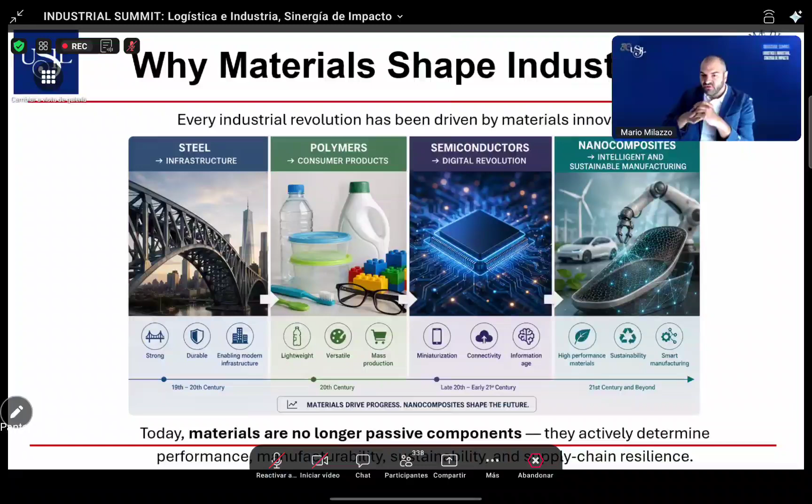Revolution that we speak about materials, because every industrial revolution has been driven by materials innovation. Today, our Pope presented his new message about artificial intelligence and how artificial intelligence can affect and influence our lives, and how artificial intelligence can also affect the new industrial revolution.

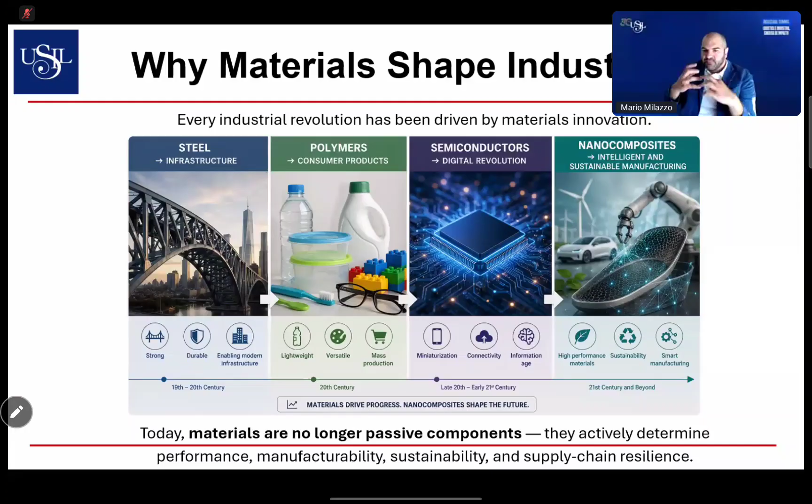But it's also important to speak about materials, because today materials are no longer passive components, because they can actually determine performance, manufacturability, sustainability, and supply chain resilience. So every century basically has had its proper innovation. We started with steel, then we moved to polymers, semiconductors, and now we are in the era of nanocomposites that can be merged together with the field of intelligent, sustainable manufacturing.

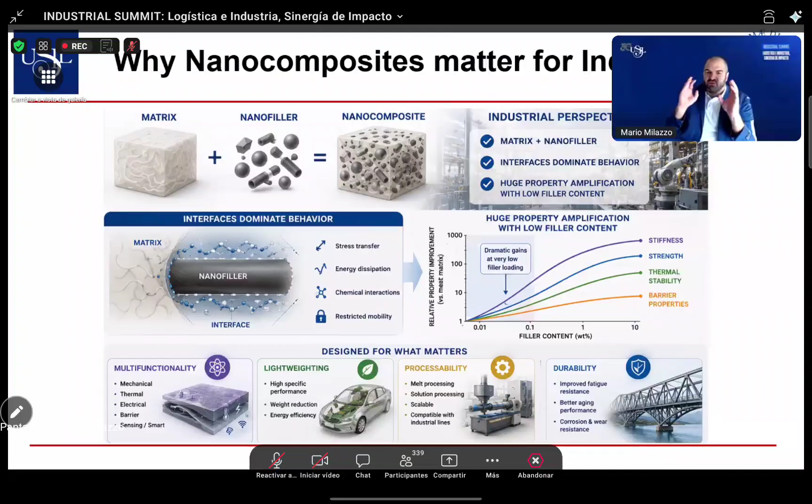So first of all, let's try to focus on the importance of nanocomposites and what they are. Nanocomposites are basically a matrix, a material that collects into its body a nanofiller. A nanofiller is something that will reinforce and transform the basic properties of the matrix in order to create, let's call it, a super material, in order to improve specific properties, as you can see here in this panel. With the increase of the filler content, we have improved properties in terms of mechanical properties. It can be thermal properties, magnetic properties, and so on.

And why are they so important? Because with composites, and specifically nanocomposites, we can get something that basic materials cannot achieve by themselves. In particular, multifunctionality. They can achieve basically the same target properties while being much lighter. They can be easily processable, so we can create different shapes, especially with the employment of 3D printing or additive manufacturing in general. And they can, of course, also target a specific durability in terms of mechanical stability, performance, and resistance in general.

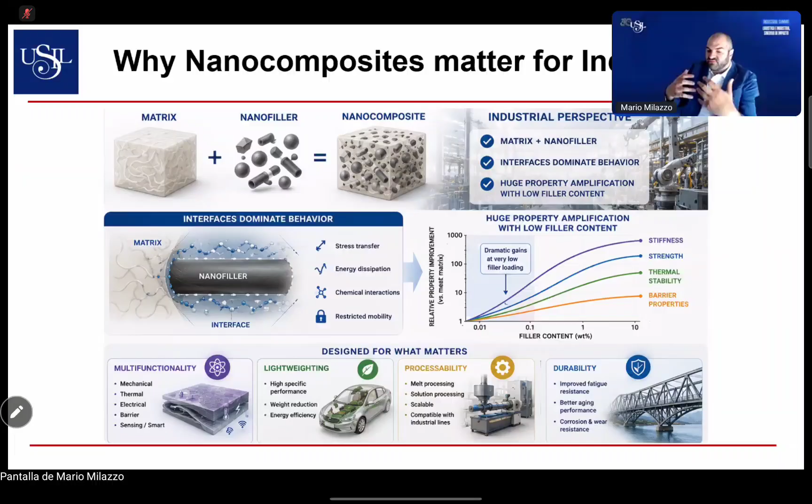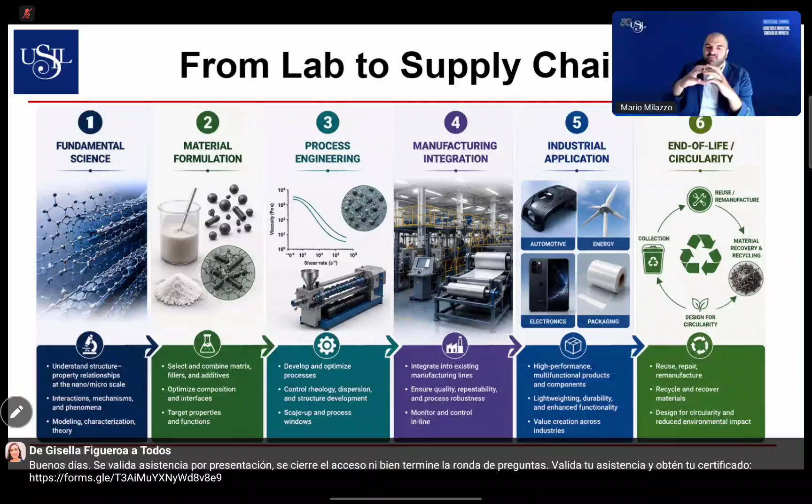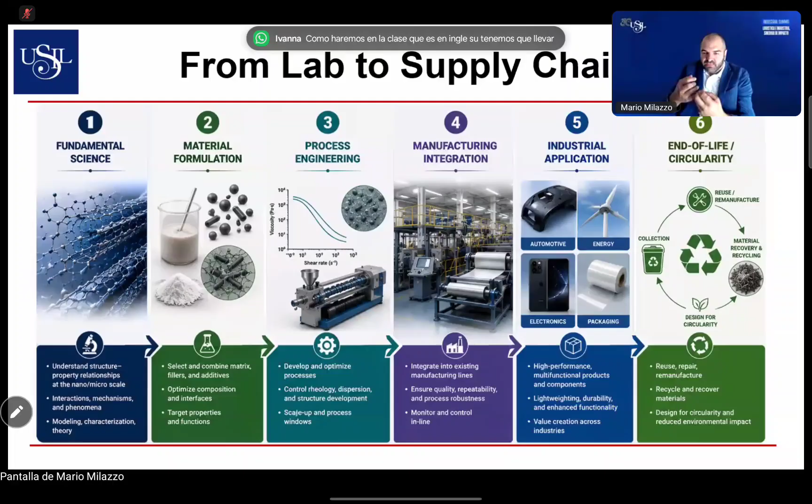From lab to supply chain, because in this presentation we are not focusing only on the specific properties of the material, but on how nanocomposites in particular can cover the entire process from the fundamental science towards the end of life of this kind of material, creating a sort of circularity from the basic science towards the industrial application. As you can see here in this flow, we go from fundamental science, because we have to deal with the basic properties of the single components, the matrix and the filler, in order to create a good formulation, in order to get specific properties that are targeted through the process, the fabrication, towards a specific industrial application.

Because we are not just relying on the fundamental science to publish papers. Okay, we at the university are always focused on published papers because this is our main output. But it's pretty important to design, to create innovation in order to have an impact in the industrial fields.

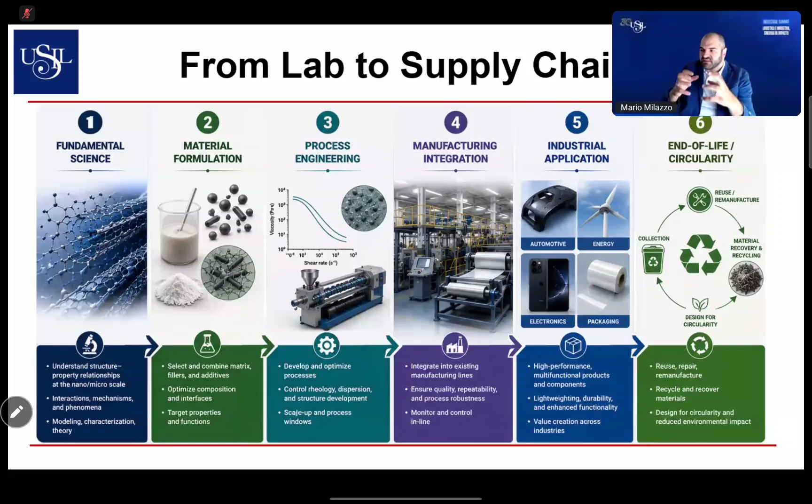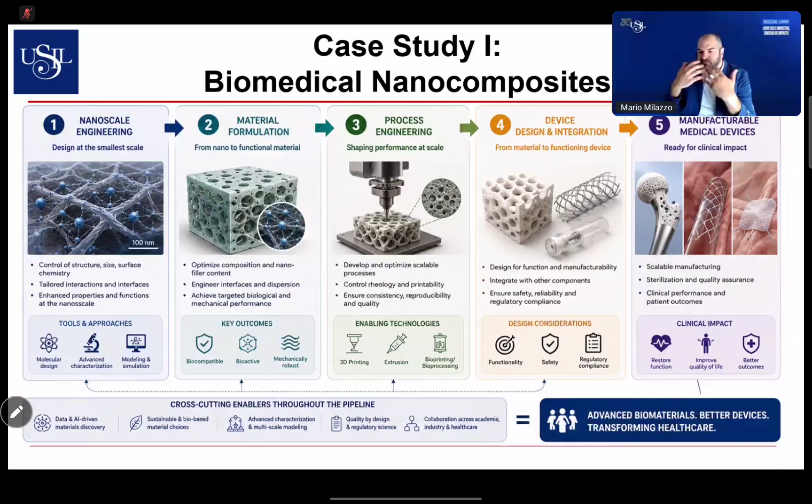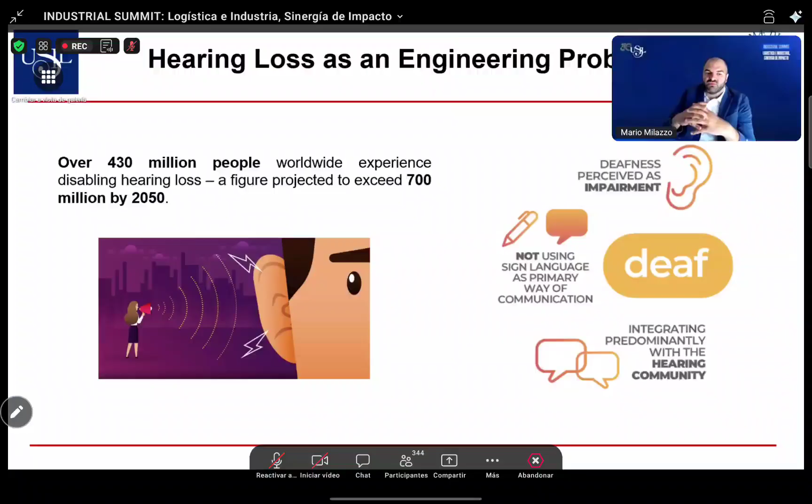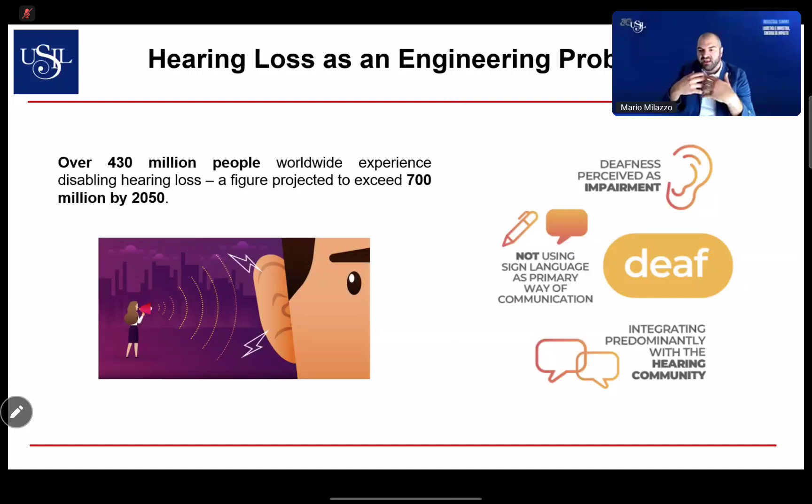Just to give you a real application, and something that I've dealt with a lot, is something that is specific for recovering hearing traumas and hearing problems. We know that worldwide we have millions of people that suffer hearing loss. And here comes the problem of recovering the hearing capability of people, for example, after traumas of the middle ear.

The middle ear is this moving structure that I put in this panel, composed of a thin membrane connected to 3 small ossicles. Just for comparison, you can see one American cent, to show you how small these structures are. And here comes the problem. What if this membrane is torn apart? It's very easy to tear this membrane, even when we are cleaning our ears. Or we have to change the structure of the ossicles because of traumas.

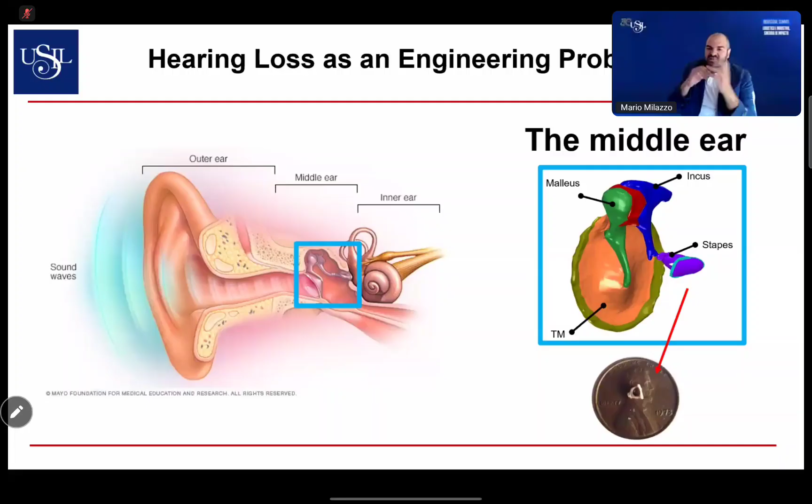Here's the example and the application of nanocomposites. In this case, a membrane that is composed of a basic, very well-known and widely spread polymer, for example, polycaprolactone, PLA, and so on, with the addition of small nanoparticles of graphene. Graphene is a very well-known material, especially in the last years, because it has a lot of properties in terms of, for example, improving strength and changing also the acoustics. In this case, we want to see the variation of the acoustic properties of the membranes.

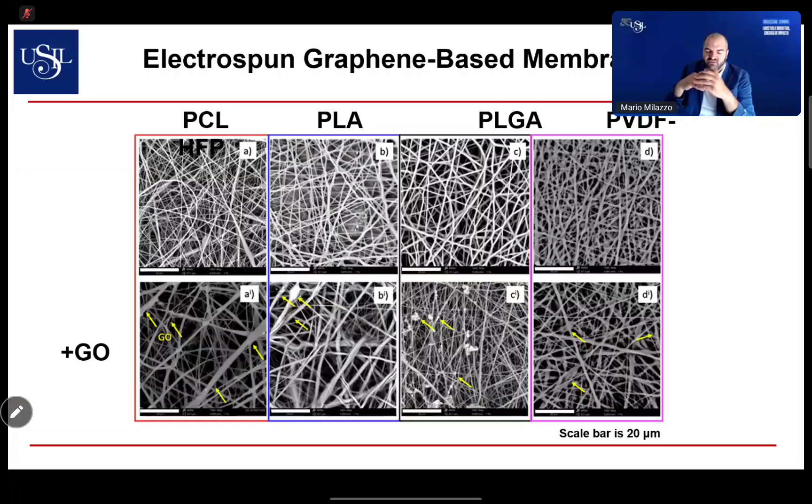And as I was saying at first, with my work I'm trying to connect not only experiments, but also simulations. Because, especially when we have to deal with biomedical applications, it's very difficult to go directly to the patient, so we need a simulation to predict the behavior of our tools in order to create something that at the very end of the supply chain can be very useful.

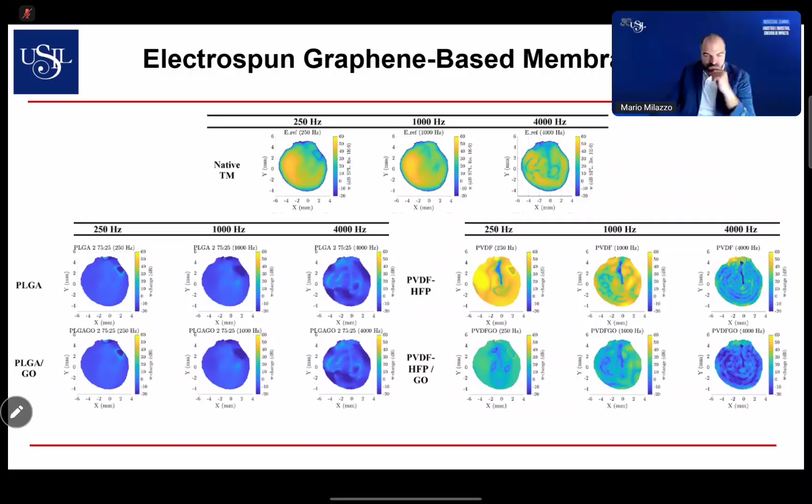And here, for example, you see these very colorful plots. You see here the top plot, the behavior of the native eardrum. Besides the numbers, you see the shape and the colors, and you see that there are materials that can replicate quite well what is originally in the native tissue and something that is not behaving well. These are tools that we can use beforehand in order to provide at the very end of our chain the best device with optimal performances.

And here comes the industrial angle of this specific application, because we fabricate this kind of membranes with techniques that can be scalable. In this case, it's electrospinning. Electrospinning is a technique with which we can create nanofibers exploiting polymer solutions and electric fields. And we can create, as you can see in the pictures, structures and membranes with specific porosities. We can play with our processes, not only with the mechanical properties, but also topological properties.

The industrial angle also has a particular interest for multifunctionality, as I was saying beforehand, because we can engineer our structures. We are not just relying on the simple manufacturing process, but we can also play with the geometries and with the physical properties in order to create other specific properties, for example, anti-inflammatory or antimicrobial properties.

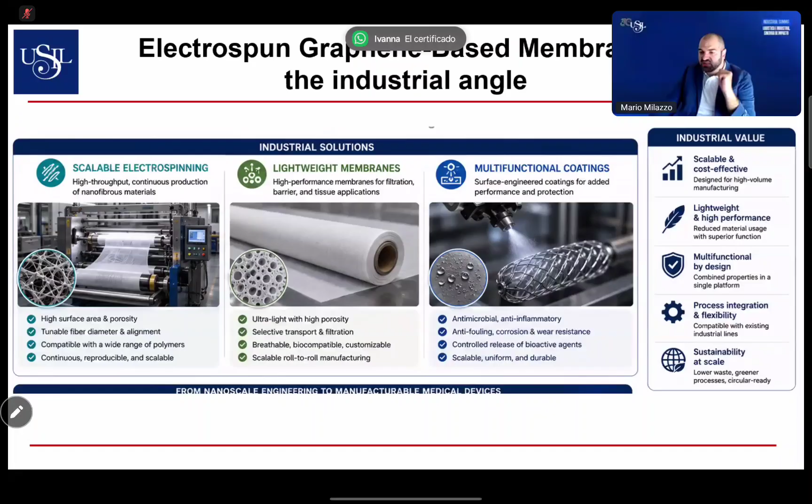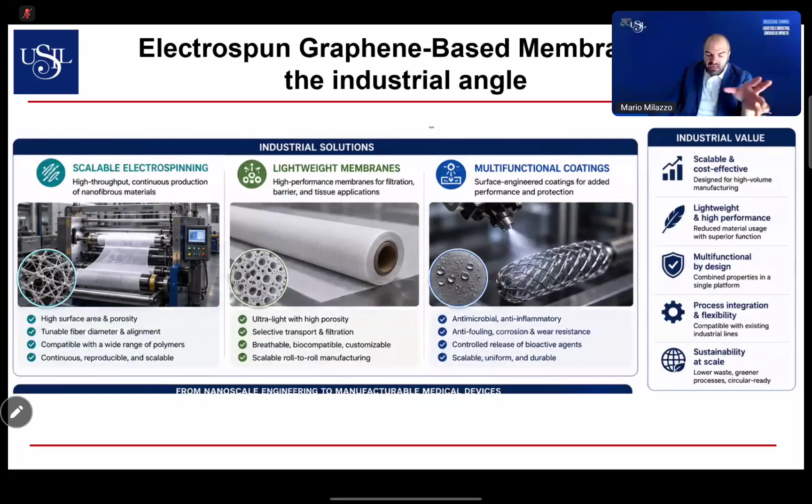And all of these applications have a very important, relevant industrial value, because we can obtain something that is multifunctional, that is light, and is sustainable, because we can create patient-specific devices that are not produced full scale in industries, but can be used specifically for the patient. So we don't have waste, and we can get a circular-ready process for our application.

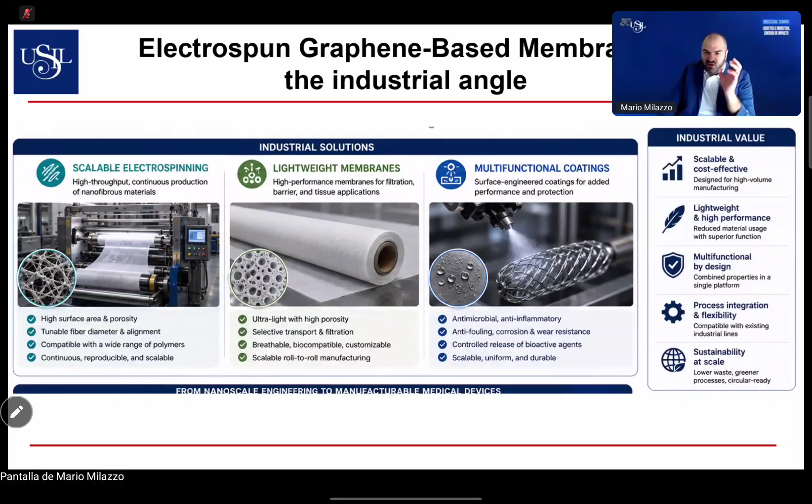Another example, always in the biomedical field, is, as I was saying, to replicate or, let's say, substitute the ossicles, the three ossicles that are connecting the membrane with the internal ear. In this case, we can use processes that go from the definition of the material and the definition of the specific properties of the nanocomposite. We are speaking about bone, so we have collagen and hydroxyapatite, and understanding from the atomistic scale the properties of such material in order to create a new substitute that can behave like the bone or even better.

We don't have to be bound to the idea that we have to replicate nature exactly. Nature is a very good inspiration, but through engineering processes and our competencies, we can also create something that works even better. Works even better from the definition of the material towards the final medical device.

So we can transform something that nature created with specific shapes into something, as you can see here, the biomedical device, that behaves similarly, but with a simplification of the geometry. And here comes, at the very end of our supply chain, the fabrication properties, in order to get this device with little material, low costs, and effective properties.

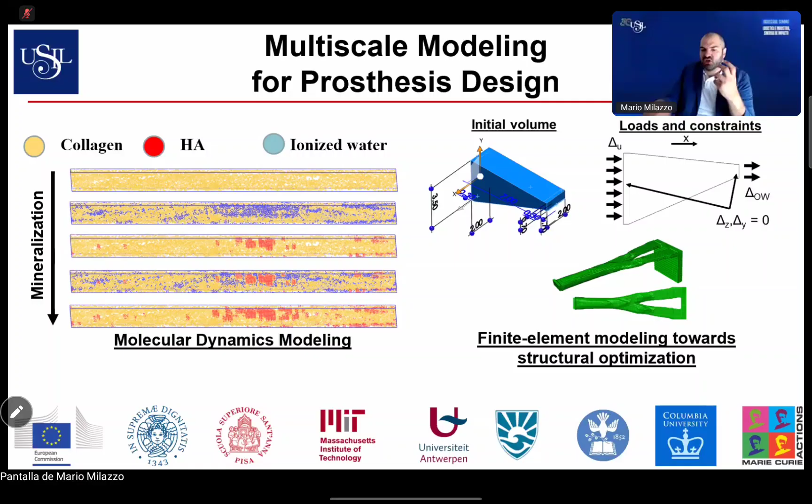And other simulations, for example, optimization simulations that are performed at the macro scale using, for example, finite element models, in order to get the best solution that is compatible with the industrial constraints.

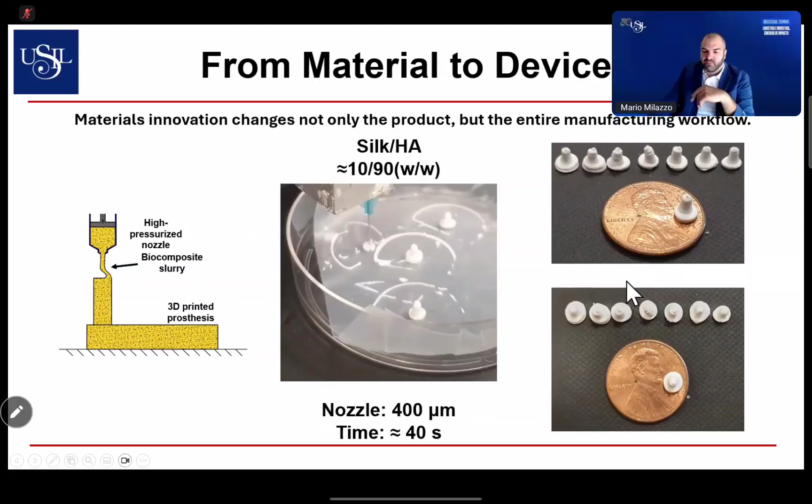Fabrication is really important. It's really important because we can design whatever we want, but if we want to pass from material to the device, it's very important to get something that is working and that targets our needs. And here you see the fabrication of the prosthesis compared to the American Cent.

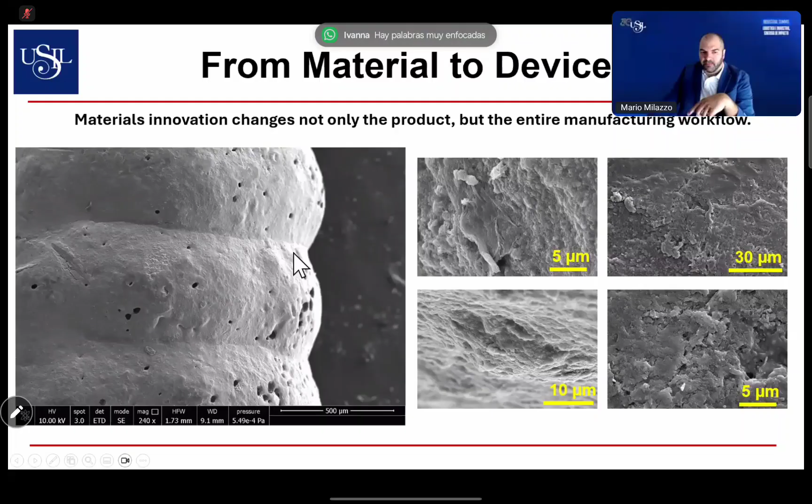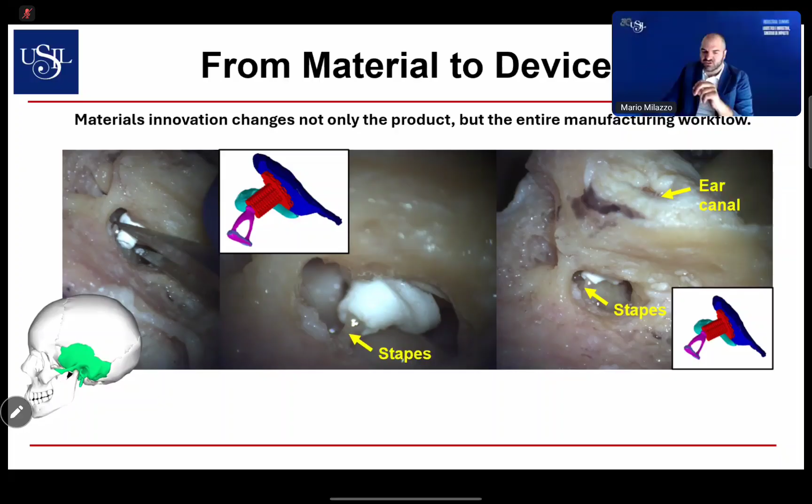Here are some images that are really nice because you see, for example, the path of the 3D printer of the prosthesis, and also the application of the prosthesis in an actual human bone, in an actual human ear, in order to test together with clinicians if these kinds of devices can work also in a real environment. Of course, this is still the lab, not the hospital and real patients, but at least we can test the ability of the surgeons to deal with new medical devices.

Speaking about sustainability, what if we change, for example, the employment of human collagen with other types of collagen, for example, from animals? Due to the increased need of bone substitutes, there's an increased need of collagen. I can assure you that human collagen is very costly. So an idea could be to use, for example, bovine or marine collagens from waste, always with the idea of creating a circular supply chain that is not wasting money or materials towards the industrial application.

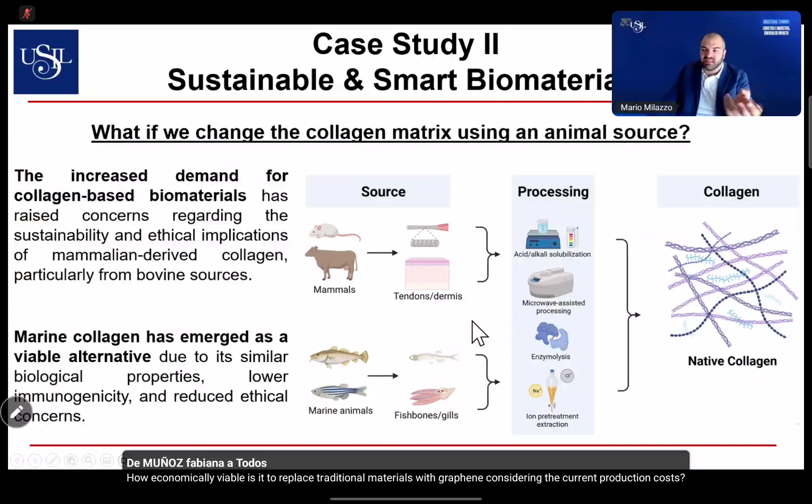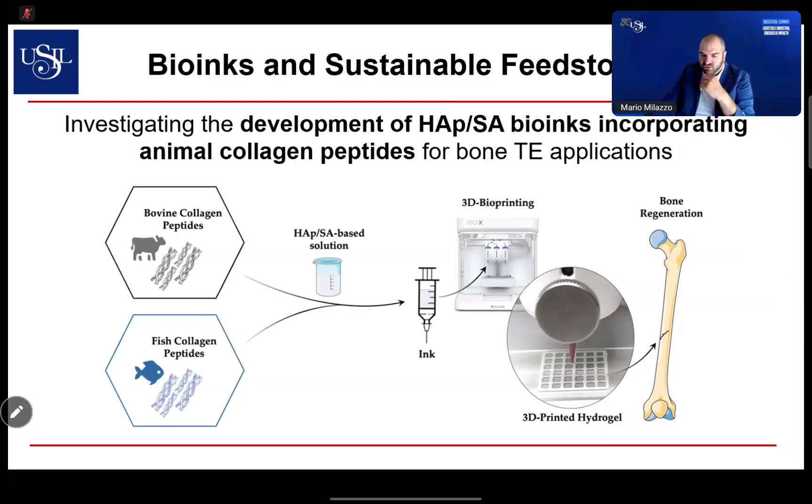And here is something that we actually did. We created, using simulations and additive manufacturing, actual substitutes for bone regeneration, as you can see here. And we can play not only with the materials, but also with the process, in order to create materials that during the cross-linking, let's say roughly the solidification, even though it's not completely correct, won't get distortions.

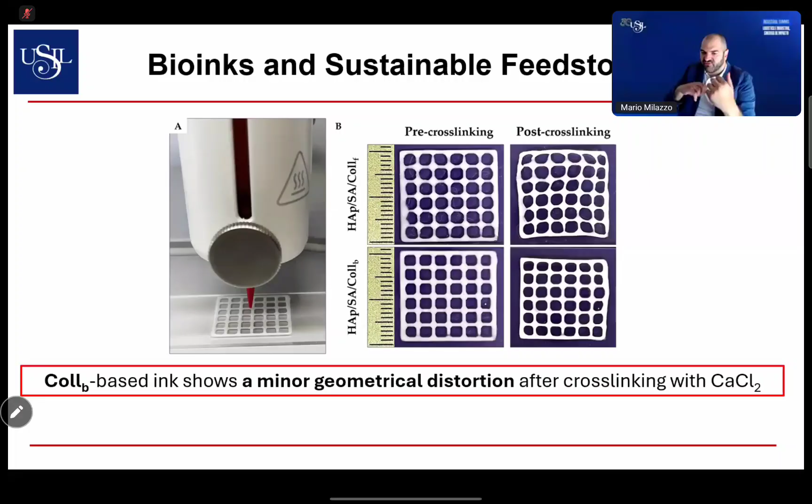If we're speaking about, for example, little bone substitutes, it's really important to create something that is really precise and accurate without distortions, because otherwise the functionality will be affected. This is something that we can study beforehand in the lab through simulations and specific experiments.

The other application that I want to speak about is playing with stimuli. So composites that can rely not only on the specific properties, let's say atomistic properties of the material, but also nanocomposites that can also exploit stimuli. Bone, for example, is a piezoelectric material. What does it mean? It means that bone, whenever it's stressed, can also release small electric currents that also promote regeneration of the tissue.

And what can we do with this? Well, we can create, for example, nanocomposites that can exploit this kind of biosignal in order to create substitutes that can perform like bone, or even better, in order to make the regeneration of the tissue faster.

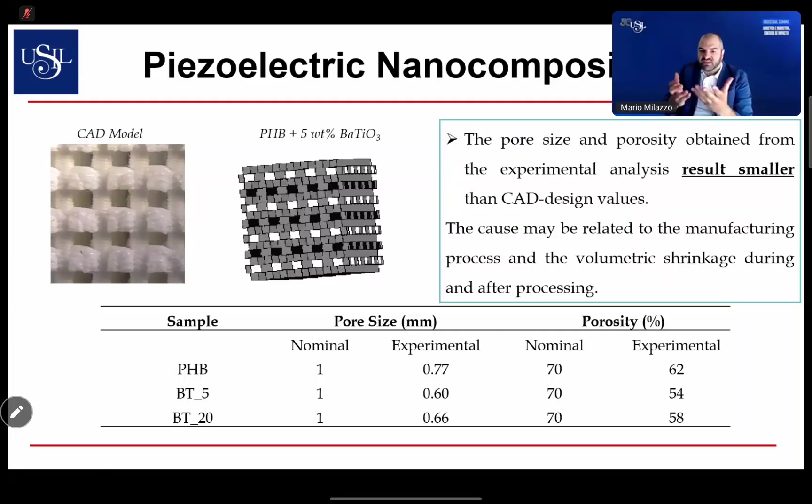Towards the final application and the final industrial device, we can exploit again additive manufacturing, in this case classic 3D printing, in order to create a shape that goes from the simulation towards the actual model. Of course, there will be differences, but differences that can be studied, predicted, and even exploited for our benefit.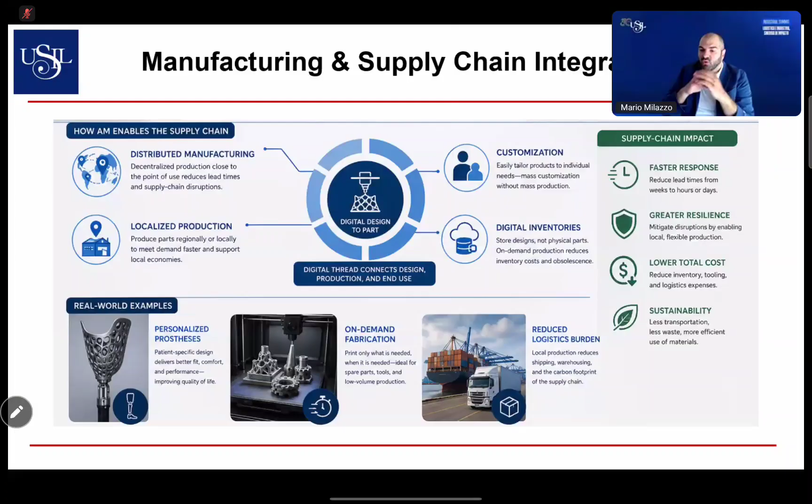So in terms of supply chain, creating a very fast response to the needs of the final stakeholders, and lowering the total costs. At the very end, nanocomposites have a specific and really important role in the supply chains of materials in this new era, because we can create something that is really circular in terms of applicability, recyclability, and reusability of the materials themselves, lowering the costs and creating something that is specific for the demands of the stakeholders.

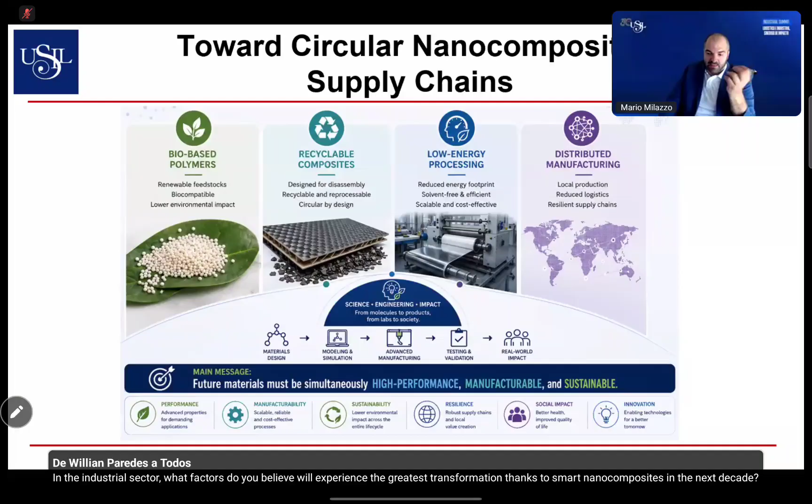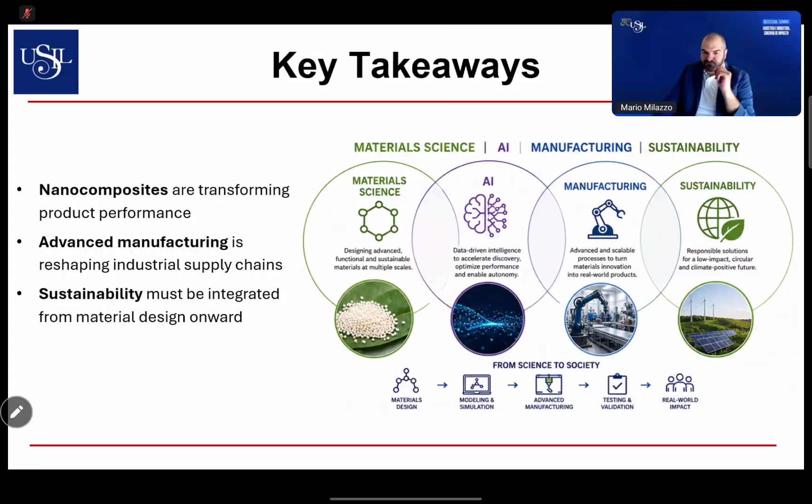The future materials must be like nanocomposites, but now in the era of artificial intelligence we have another tool to create high performance, manufacturable, and sustainable materials and innovation. Key takeaways: nanocomposites are transforming product performance. Advanced manufacturing is reshaping supply chains in industry. And sustainability is no longer something put aside for the final evaluation, but is central in all phases of the design of materials in order to get the best device, the best application for our needs. Thank you very much for your attention.

Thank you very much, Dr. Milazzo. It's a fascinating look at how material science will directly impact supply chains. Now, let's move on to the questions. The first question: what do you consider to be the main challenge in implementing nanocomposites in industrial supply chains in developing countries such as Peru?

In my opinion, it's a matter of investments in terms of competencies and equipment, mainly. Nanocomposites have been in the field of material science for quite a while, so the idea is to train new generations with the idea that they don't have to use just traditional materials, but can play with the design palette in a smart way, also with the help of artificial intelligence. I'm not against artificial intelligence, but everyone has to use it with critical thinking. The design palette is really open, so it's a matter of training and investments in order to have the best equipment to manufacture and create the supply chain towards applications and devices.